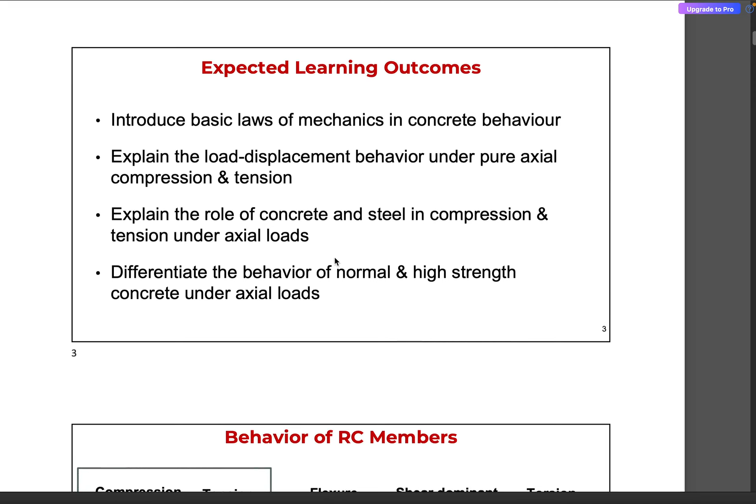These are the expected learning outcomes for this week: we are going to introduce the basic laws of mechanics in concrete behavior, explain the load deformation or load displacement behavior under pure axial compressive and tensile loads, explain the role of concrete and steel in compression and tension - how they take up loads and deform under compressive and tensile loads - and differentiate the behavior of columns using normal strength concrete versus high strength concrete.

Reinforced concrete members are predominantly subjected to four types of stress resultants: axial - compression or tension; flexure, that is bending; shear, as seen in the form of lateral loads; or torsion, that is twisting about the central axis. The focus of this week's lecture and live interaction session is going to be the axial behavior.

We are going to essentially consider a column and develop the force deformation relationship when it is subjected to either compressive or tensile load, and we are going to combine these.

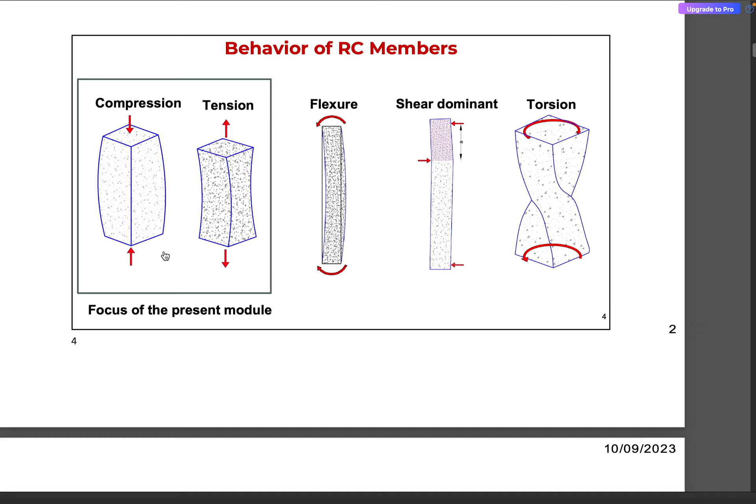Stiffness works to prevent lateral swaying of the frames. Exactly right. So first we are going to provide the bracing so as to ensure a higher stiffness of the structures, because whenever there is a lateral load in the form of earthquake or wind, it can sway in the horizontal direction. So in order to impart stiffness, we introduce bracings.

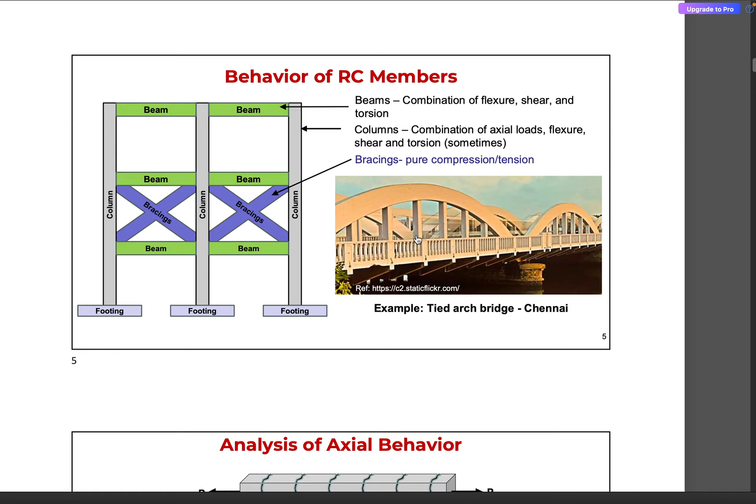These bracings are generally provided with a pin support, pin joint at either ends, so they're usually made to undergo either pure compression or tension. For example, in this tied arch bridge, these vertical members are subjected to either tension or compression.

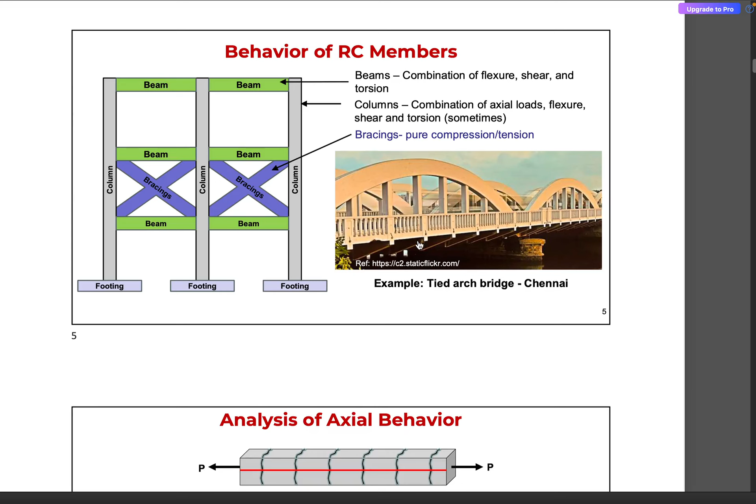Whenever we consider a column, there can be a combination of axial, flexural, shear and torsion, but for this particular module we are going to study only the axial behavior. In the subsequent modules we are going to increase the complexity of the mechanics problem, where we will introduce the flexural load and the shear load, but for this module we confine ourselves only to axial loading.

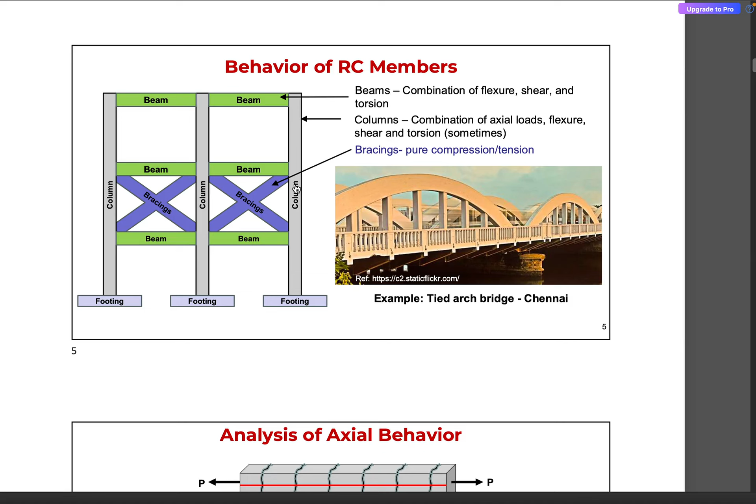Moving forward, here we have a column made of concrete that is reinforced with steel. The behavior of this reinforced column can be likened to that of two springs connected in parallel, having a parallel configuration, with two rigid plates.

Whenever we apply a uniform compressive or tensile load, both these springs undergo equal amount of deformation, equal amount of axial deformation. However, the force is going to depend on the stiffness of each of these springs.

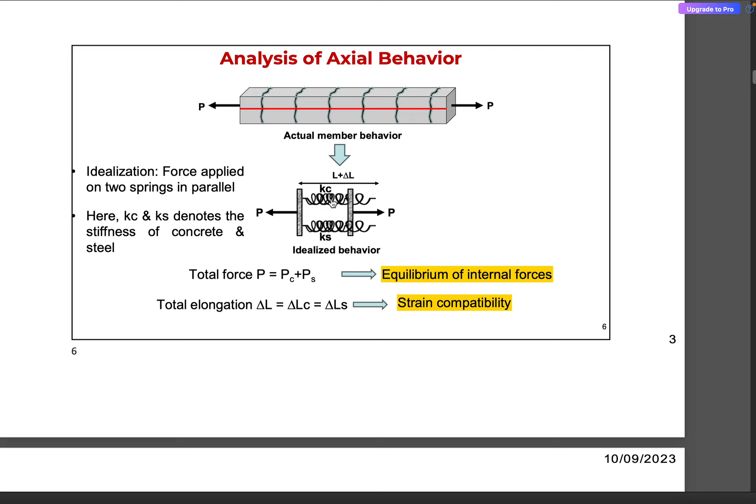So we are going to solve the problem by using two basic principles of mechanics. We have the equilibrium of internal forces, that is, the external load applied P is the sum of the internal resistance provided by the concrete and steel. External load P is equal to resistance provided by concrete plus the resistance provided by steel.

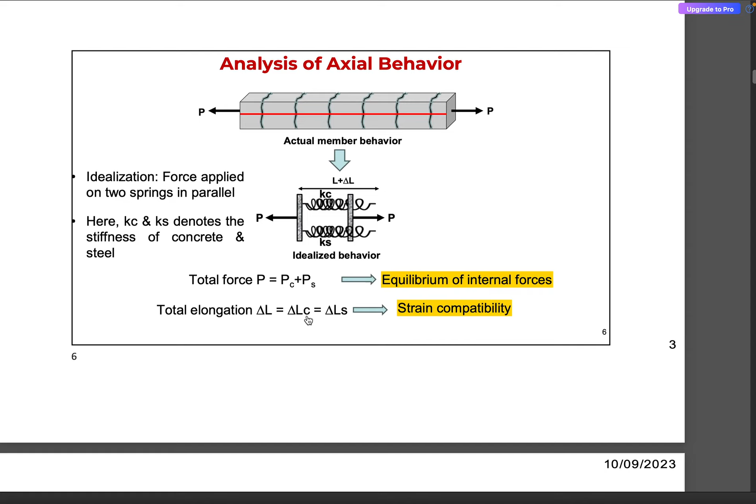And then the second principle is the principle of strain compatibility. We assume that both these springs deform by the same amount axially, that is, elongation delta L is equal to delta LC is equal to delta LS. That is, elongation in concrete is assumed to be the same as the elongation in steel bars.

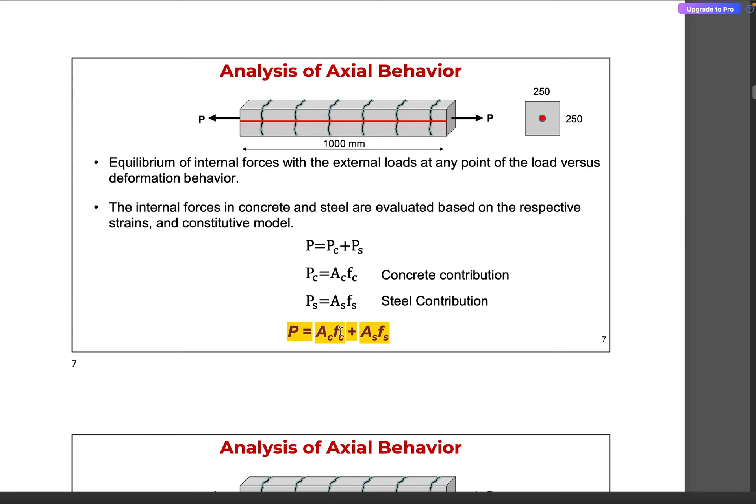So the total load on the column is expressed in terms of the area of concrete and the stress in concrete, and then the area of steel and the stress in steel.

Whenever the deformations are within the linear range, that is, if we consider the stress strain behavior... let me try to explain this with some detail. I'm going to briefly explain this phenomenon. So basically we are discussing about the column.

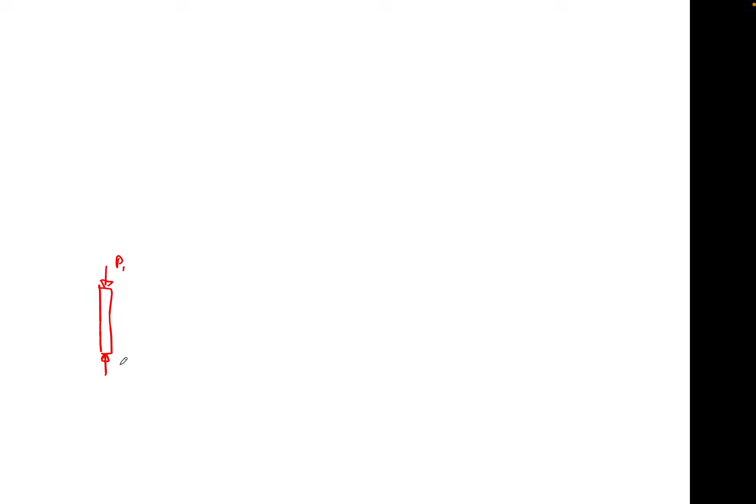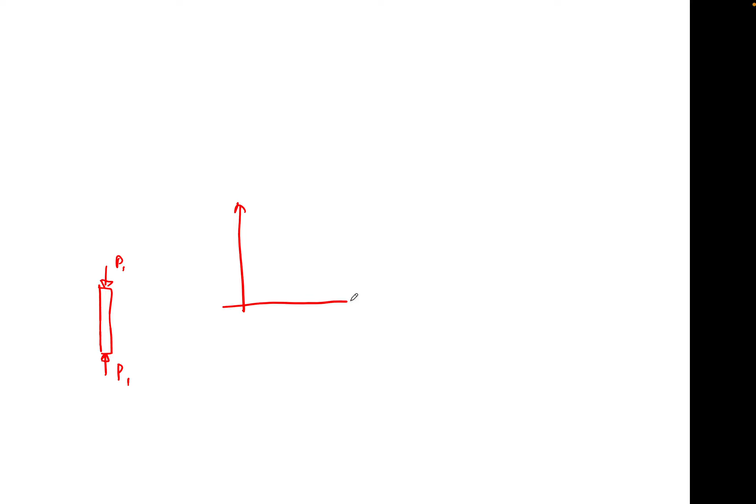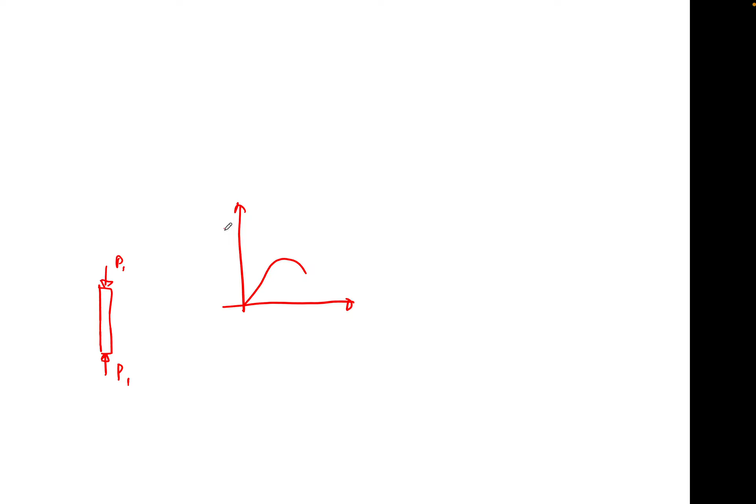So we are going to subject it to a compressive load, let's say it is P1. This corresponds to the stress strain curve of concrete. There is a linear portion before this point, let's call it epsilon 1. So as long as the strain is within the value of epsilon 1, it behaves in a linear fashion.

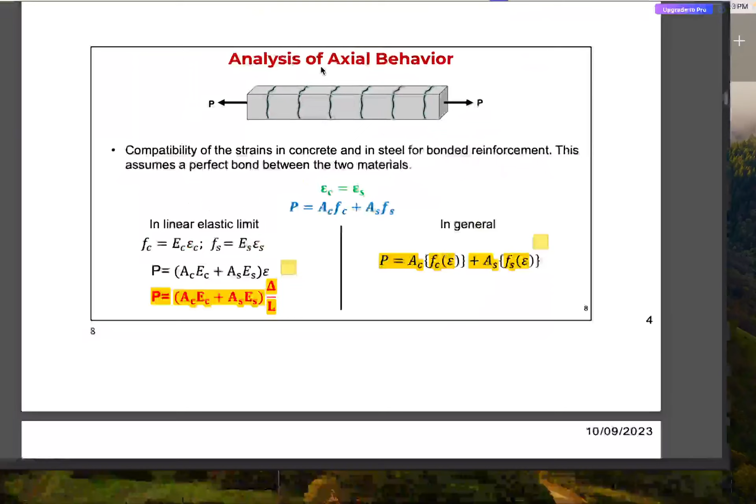In that case, this particular equation holds good: P is equal to AC into EC plus AS into ES, and epsilon is still in the linear zone, still in this linear part of the curve.

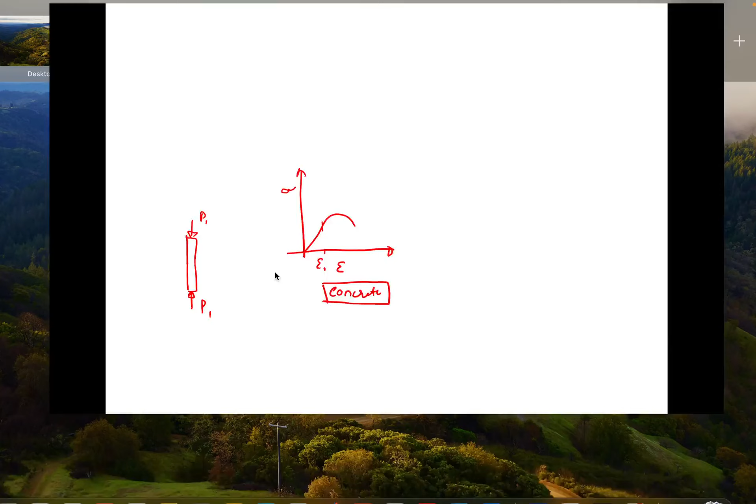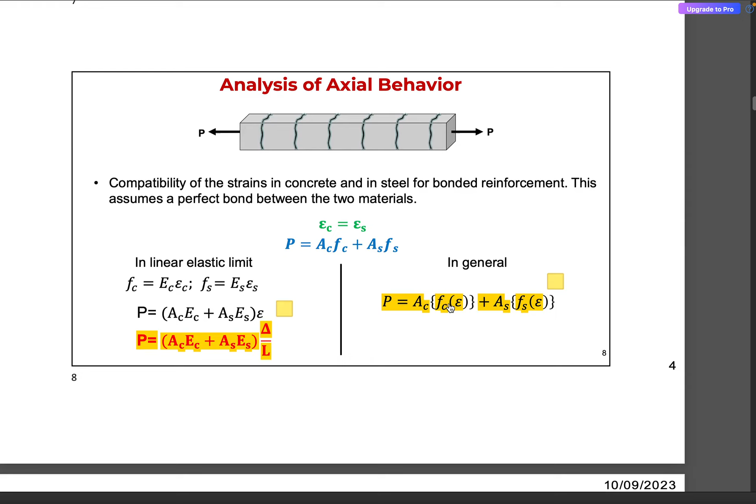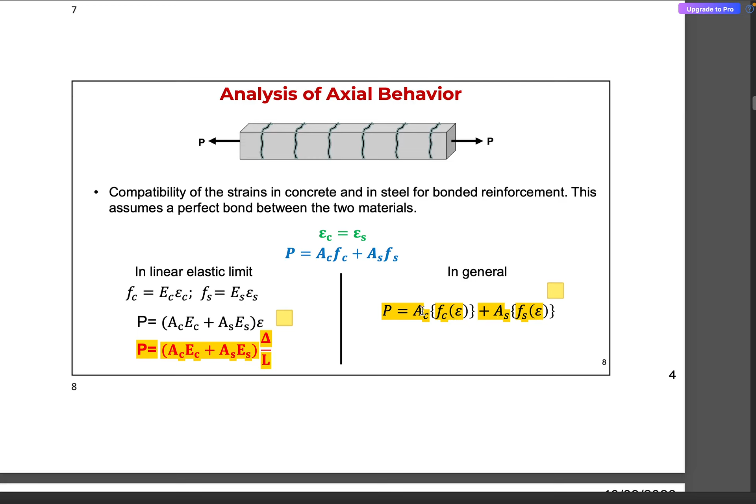However, when the column goes into the nonlinear zone, that is, the strain enters the curved or nonlinear part, the calculations are a little more involved, and we express the stress in concrete as a function of strain. First we pick a value of strain, then determine the corresponding value of stress, and when we multiply that with the area of concrete, and do the corresponding calculation for steel, we ultimately get the value of P, the axial load within the column.

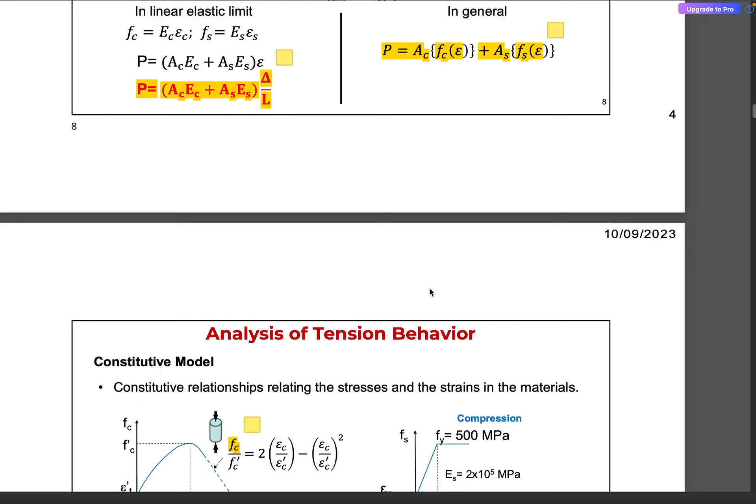In order to characterize the stress strain behavior, we have the parabolic law, or the Hognestad law, for concrete, and then for steel we assume a bilinear relation. Up until the value of Fy, it has a linear relation, and then it plateaus, remaining constant at around 500 MPa. This relation is assumed to be the same for compression and tension.

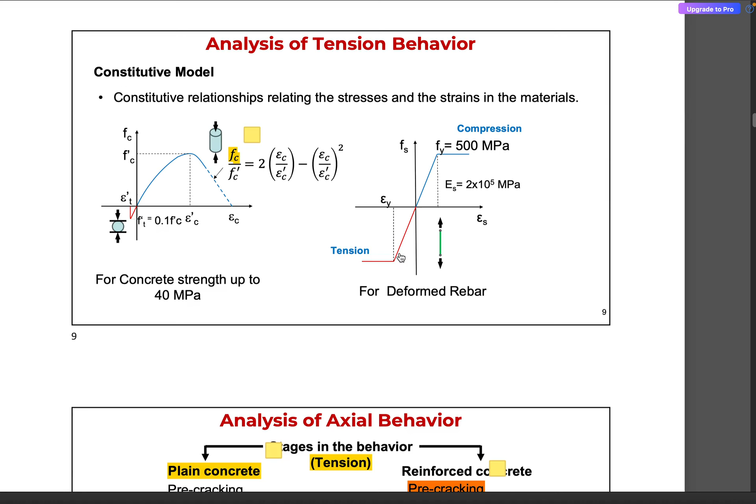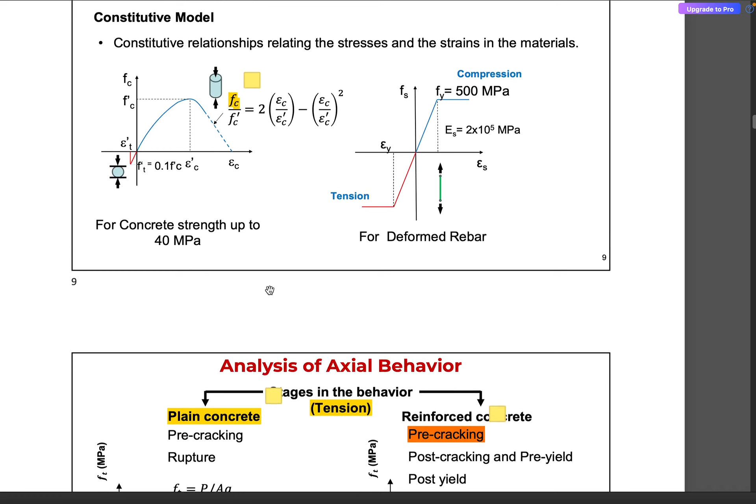And for concrete, however, we have this limit on the tensile capacity. We are going to be discussing more about these concepts in the form of numericals. In fact, 90% of the class today is going to be based on numericals only.

Then we have for plain concrete, the behavior of plain concrete varies from reinforced concrete. So upon reaching the maximum tensile load, the column ruptures. However, when we consider a reinforced concrete column, it has multiple stages.

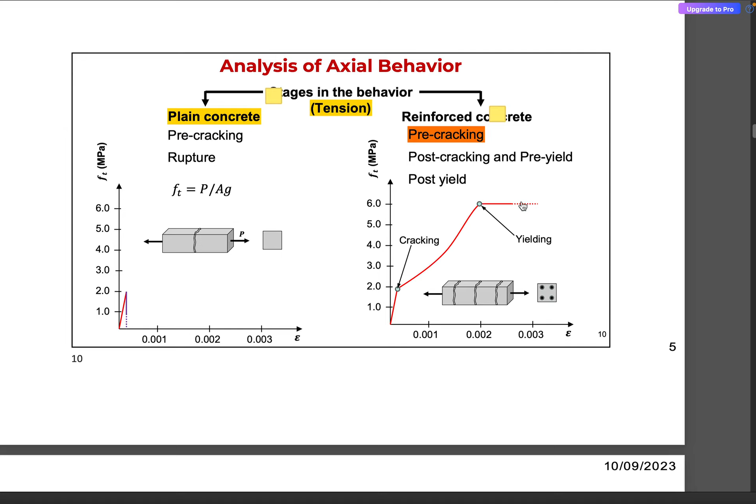First it is going to experience cracking. Up until the point of cracking, all the load is entirely resisted by concrete, but once the concrete ruptures, the load is going to be taken up entirely by steel, signified by this part of the curve. Then once the steel also undergoes yielding, it is going to have a yielding profile.

So we are going to analyze the members for axial behavior. What we mean by analysis is that we are going to develop force deformation curves. This is the algorithm that you are going to follow. So in order to develop the force deformation curve, if we take any axial member...

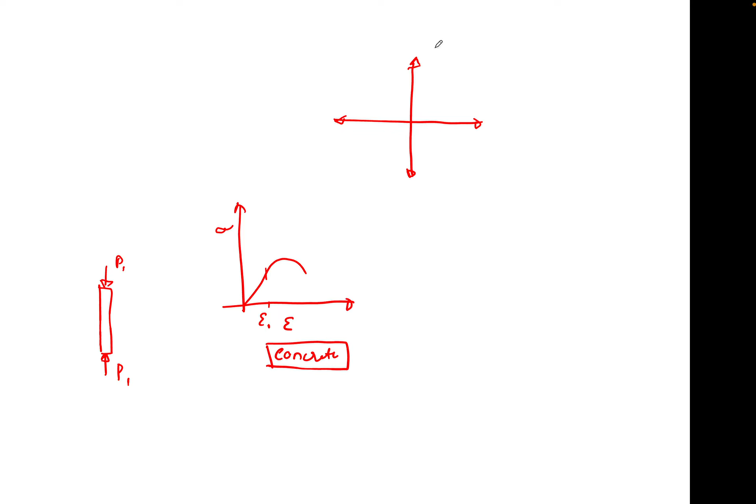The y-axis is defined by the force, and the x-axis is defined by the deformation delta. So what we are going to do is pick different values of strains, and then plot the behavior on the compression side, and then plot the behavior on the tension side.

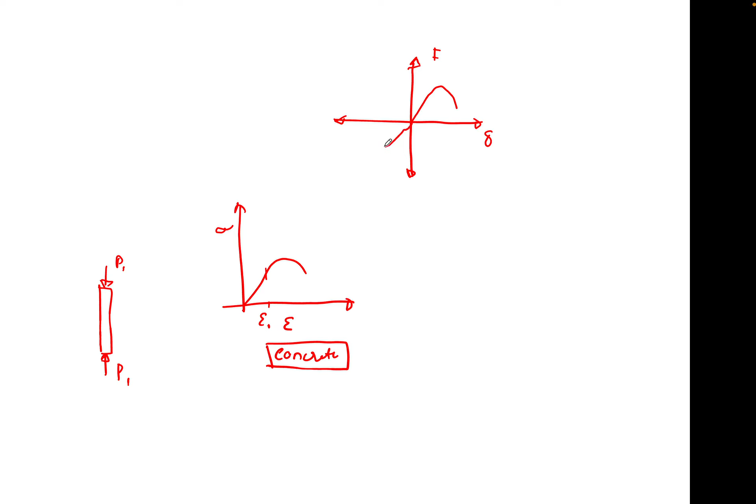This is what we intend to achieve in this class. The algorithm is that we choose a value of concrete strain, then find the corresponding strain in steel through compatibility, and then determine the stresses in concrete and steel through the constitutive model, whether it is the Hognestad relation or the Thorenfeldt relation for concrete, or the stress strain relation for steel. Then we calculate the corresponding load through the equilibrium equation, and determine the axial deformation using the value of strain by multiplying it with the length of the member.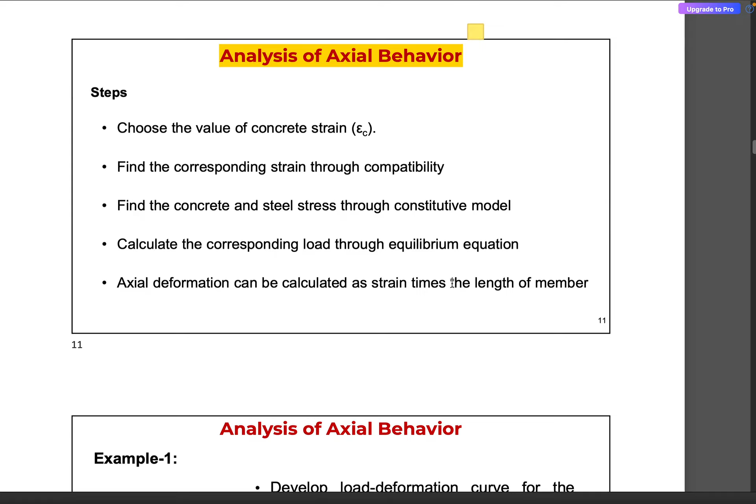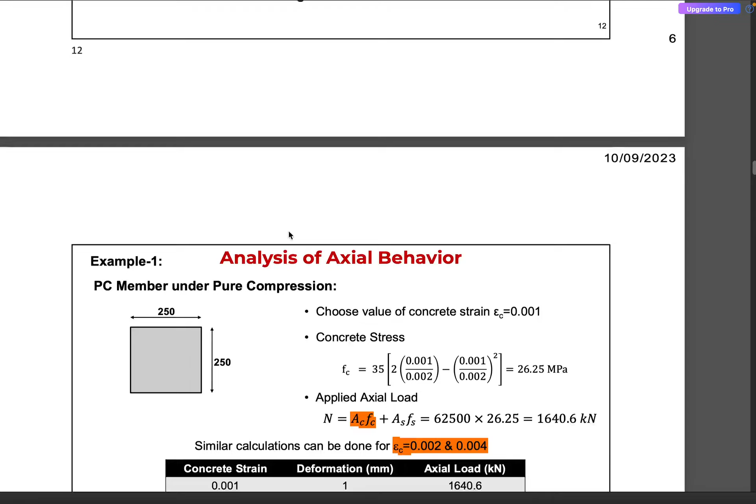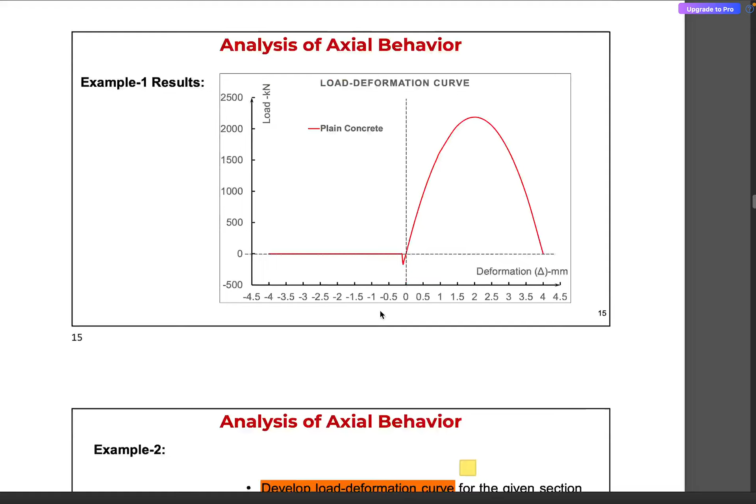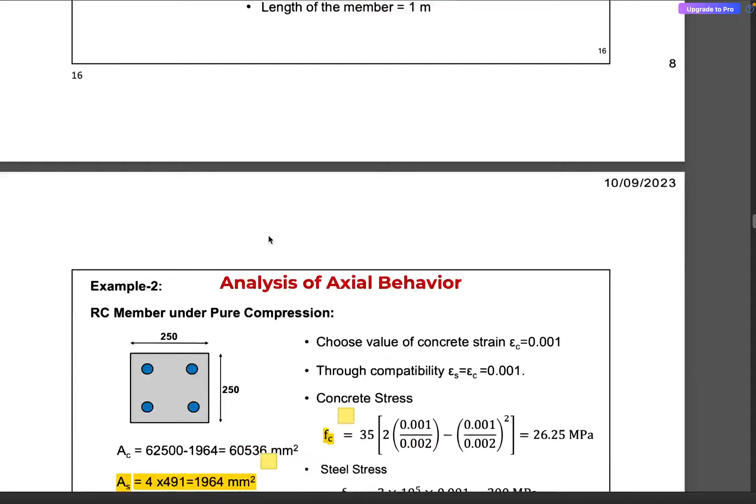In the lecture of Professor Surya Prakash, he started with the behavior of a plain concrete column, and then we developed the force deformation curve. This is how it looks like for a plain concrete column on the compressive side and on the tensile side, and then we looked at how the behavior changes when we introduce these steel rebars.

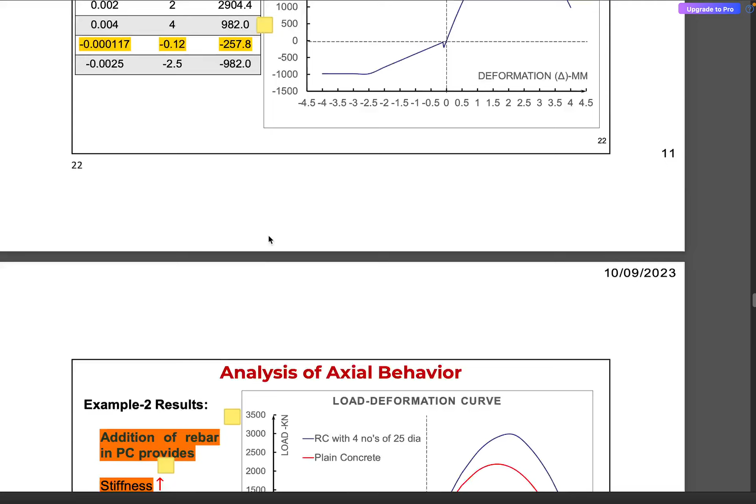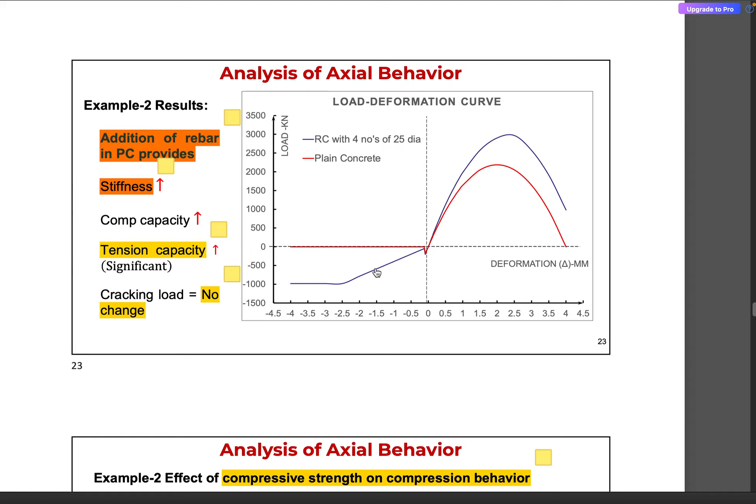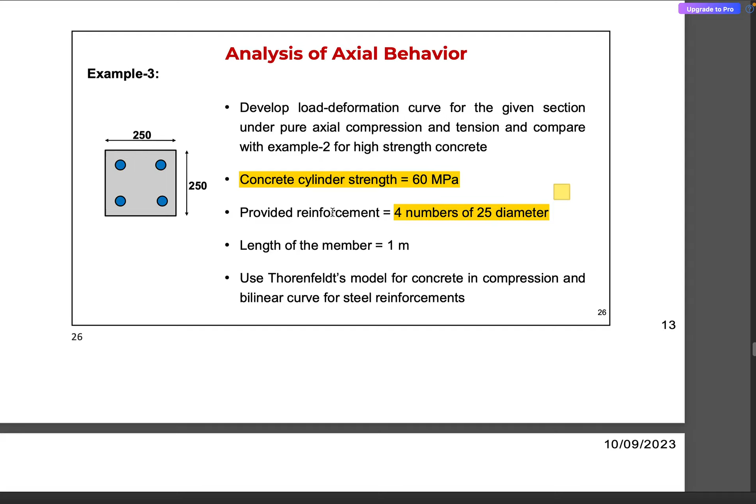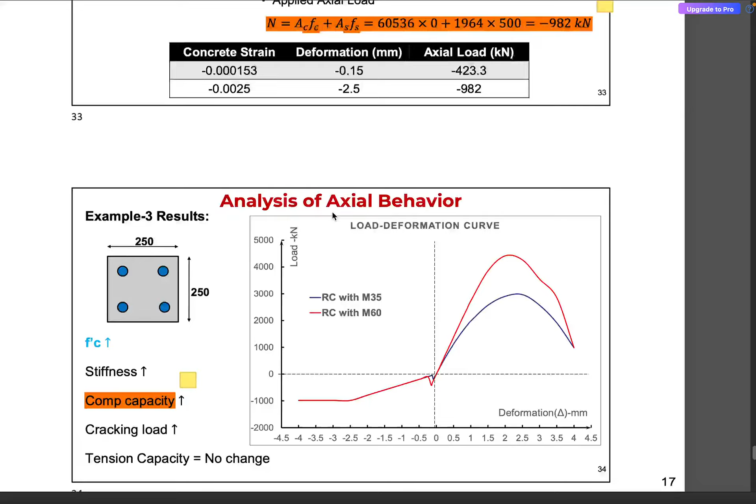Here is a comparison: both the compressive and the tensile capacity of the column improves significantly when steel rebars are introduced. Then for the third problem, we replaced the normal strength concrete with high strength concrete, and with the same reinforcement we evaluated what would be the change in the axial behavior, and after several calculations we developed the load deformation curve.

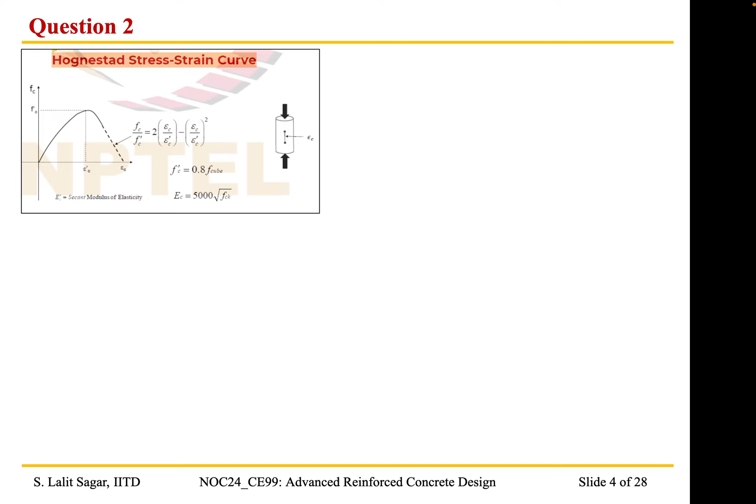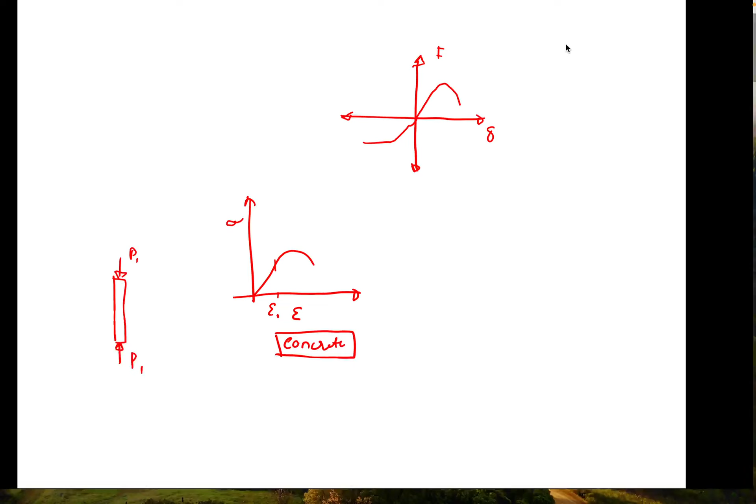Right, as the participants answered, the correct answer is D. I'm happy that you got it correct. I'd like to go ahead and solve the problem for you. Let me outline the steps first.

Step number 1 is that we have the value of epsilon c given. From that strain value we need to find out the value of stress, that is Fc, and from that we need to find out the axial load. It is quite straightforward, and the constitutive relation is governed by this particular parabolic law, the Hognestad stress-strain curve.

So for epsilon equal to 0.001, when we plug the value of epsilon here, we know the value of F prime C, the concrete cylinder strength, is 30 MPa, and we assume the value of the peak strain, epsilon prime C, is 0.002.

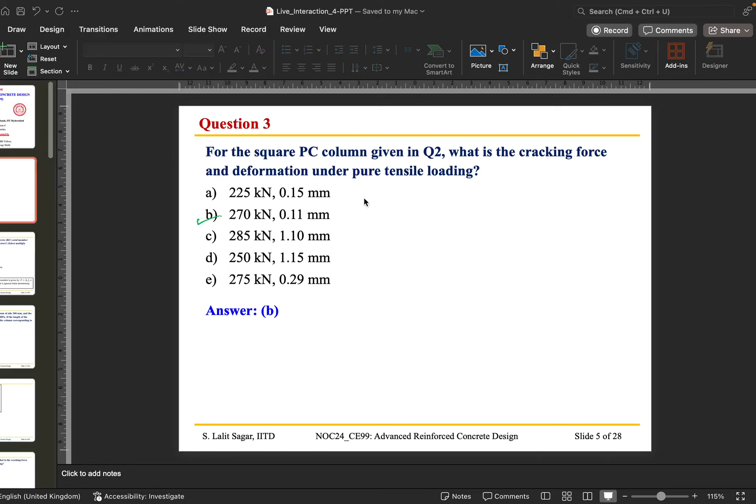So I hope that we are able to solve the problem. Okay, moving ahead, we will go to...

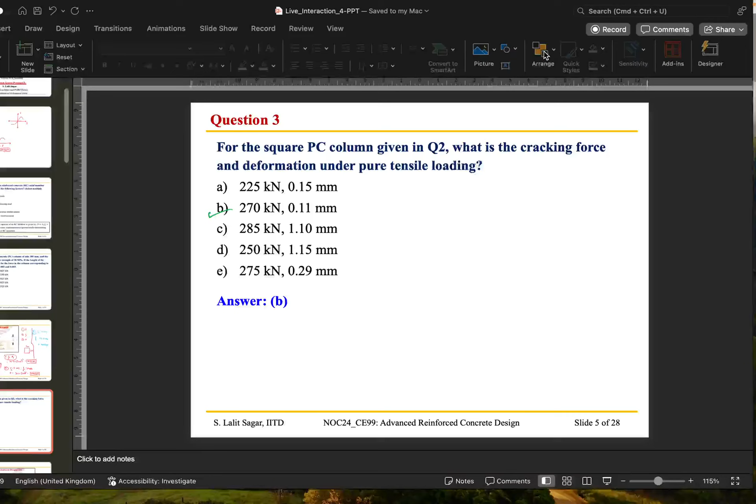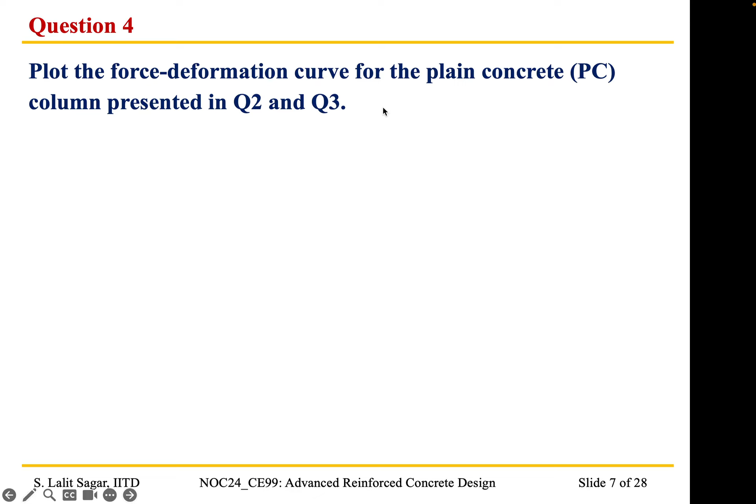Okay, I hope that my screen is visible. So now the question is to plot the force deformation curve for question 2 and question 3, that is, we are going to combine the compressive and the tensile behavior.

Yes, so basically I have used the results that we got from question 2. I'm just going to highlight for clarity. So this particular part of the curve, the positive one, was plotted from question 2, and this from question 3. You can just do a similar exercise with you.

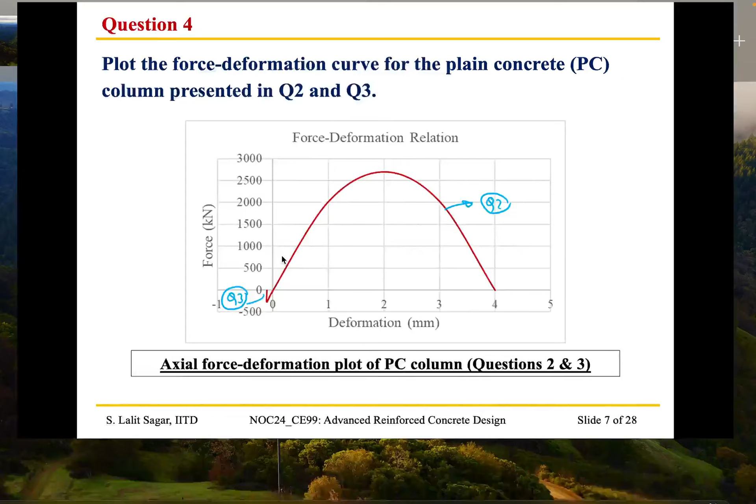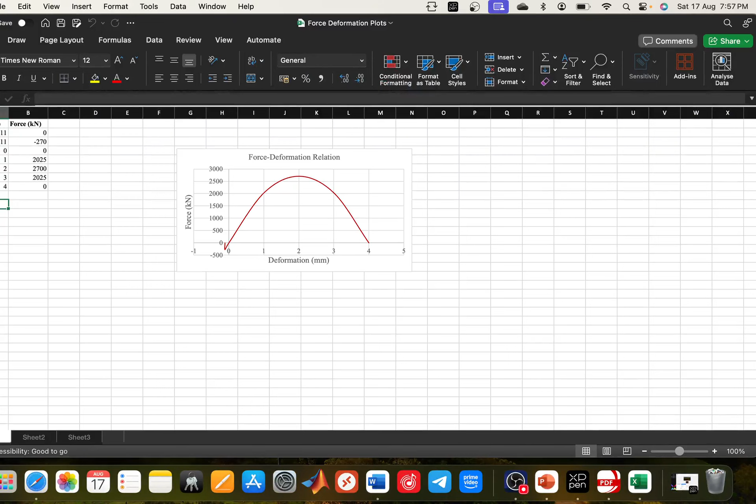If you have, you can just use Excel and plot it. So if anybody is interested, I have solved this using Excel, and I'll be happy to share this with you. I have done it for the different problems that we're going to discuss in class today.

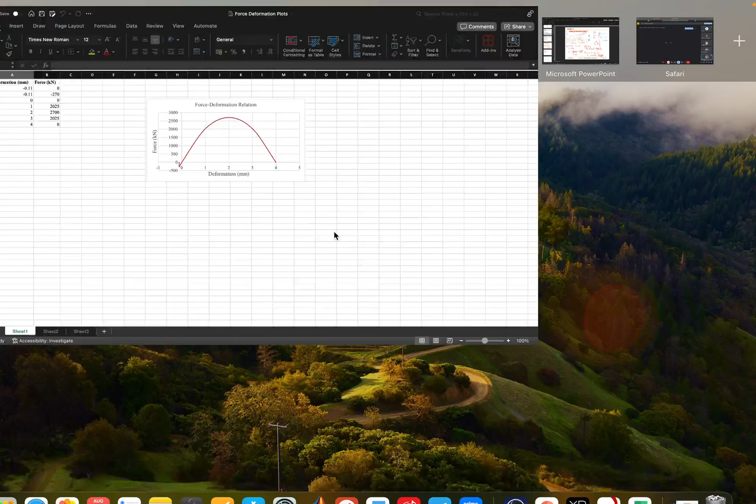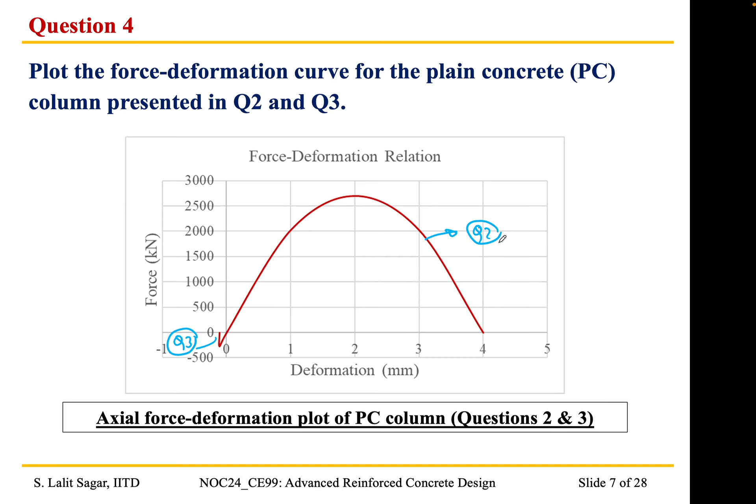Okay, so moving on, we'll move on to the next question. In the first question we looked at the axial behavior of a plain concrete bar. For the next problem we are going to see how the behavior changes when you introduce steel rebars.

Okay, yes, so this is the question. Please read the question carefully. Consider a square concrete column of side 300 mm and length 1 meter. The concrete has a mean cylinder strength of 30 MPa as with the previous problem, and the column is reinforced with 4 steel rebars of 25 mm diameter. What would be the force in the column corresponding to concrete strains of 0.001, 0.002, 0.003 and 0.004? Assume Fy is equal to 500 MPa.

Okay, you can take 4 minutes, then we are going to discuss the solution for this particular problem. I hope that all of you can try the problem, try to solve it.

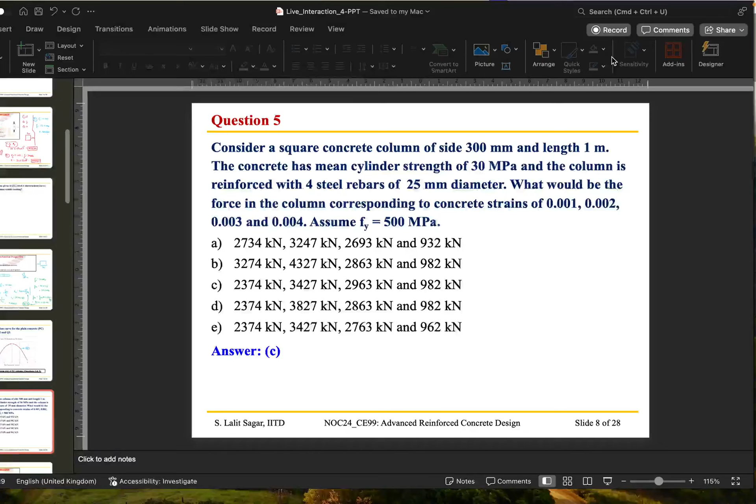So we'll be looking into the solution right now. I'll draw the sketch of the cross section over here for reference. Right, so we have a square column. I hope that the participants who could not answer are noting down the steps. And we have 4 rebars of 25 mm diameter.

Right, so we have 4 bars of 25 diameter. So the first order of business is to find out the value of area of concrete and the steel rebars. So we have area of steel is pi by 4 into 25 square multiplied by 4. We get 1963.5 millimeter square, and AC would be 300 square minus AST. Okay, so that would give us a value of 88036.5 mm square, right?

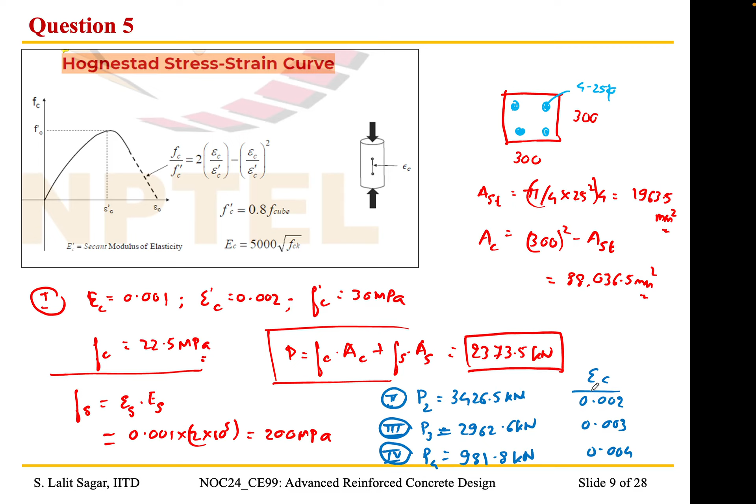Okay, so we are going to plot the force deformation curve in subsequent slides, but before that there is a problem, and we would like to know, just like how we saw what is the load corresponding to different compressive strain values, what would be the cracking force corresponding to the pure tensile loading? What would be the cracking force and the corresponding deformation? So you can take 2 minutes, then we can look at the solution.

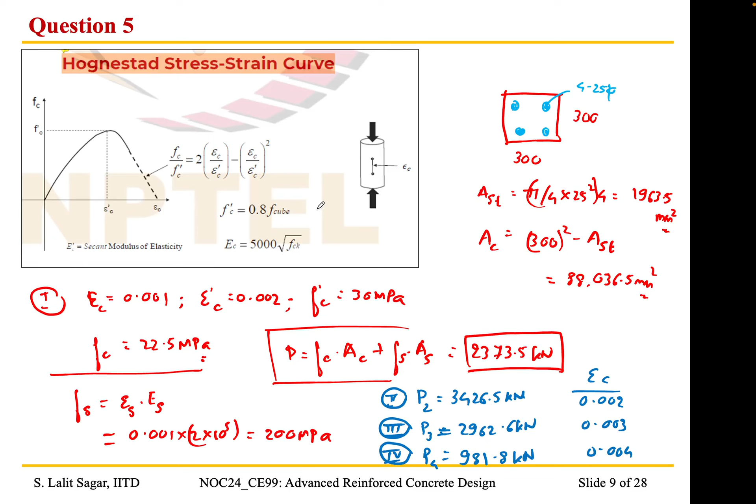However, the cracking load doesn't vary so much. Let us look at the value of cracking load. It was 270 kilonewton for a plain concrete column, and for the reinforced one it was 307 - hardly a 10% increase. So in comparison to other properties, the initial cracking load was least affected, or it didn't vary significantly.

So we will move on to the next problem. Again, stiffness increases, compressive capacity increases, tensile capacity increases, but there is no significant change in the cracking load.

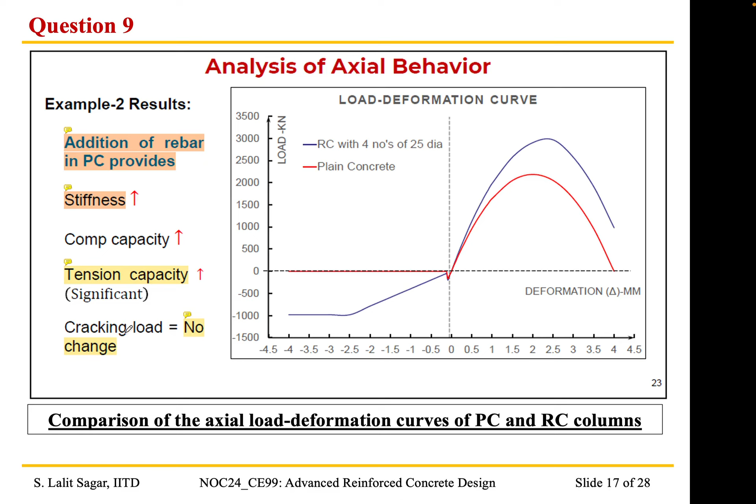So we are going to look at a concrete column with high strength concrete. For the square concrete column of side 300 mm and length 1 meter, what would be the force in the column corresponding to the strains of 0.001, 0.002, 0.003 and 0.004, where the mean cylinder strength is 65 MPa and the column is reinforced with 4 steel rebars of 32 mm diameter. Kindly solve this problem.

You can take 5 minutes. The main change to consider here is that in the previous problem we had considered the parabolic stress strain relation, or the Hognestad relation, but here, since it is high strength concrete, we need to consider the Thorenfeldt relation. So I request you to have a look at the lecture slides of week number 2 and week number 4 and try to solve this problem.

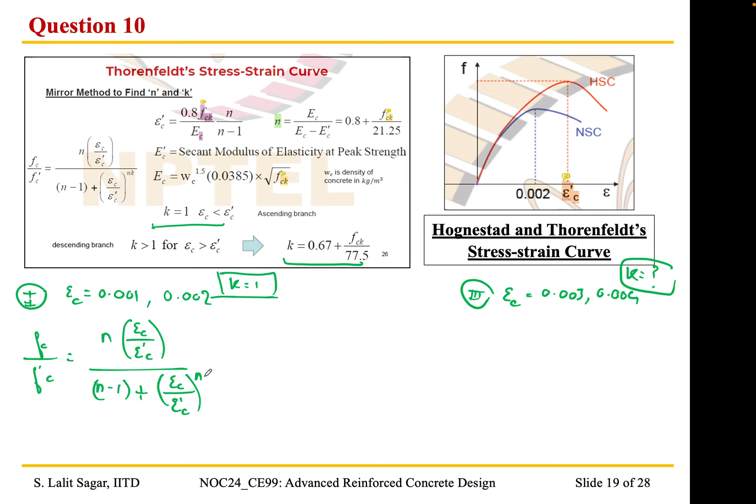So first of all we start off by finding out the value of n. I'm going to write it in a different color so that we can obtain the values required in this equation and start plugging them in. So the value of n is given by 0.8.

So while discussing in the live interaction session 2, I had requested you to make a modification in this formula. It is not FCK, it has to be FCU, that is cube compressive strength, by 21.25. Substituting: 0.8 plus 65 into 1.25 divided by 21.25 gives us a value of 4.62.

So when we plug it in this equation, for simplification, for 0.001 I'll take epsilon c by epsilon prime c as 0.5. So when we substitute in this equation, we get 65 into 4.62 into 0.5 divided by 3.62 plus, I'm sorry, this has to be plus, excuse me, let me take the eraser. Yes, so we have 3.62 plus 0.5 to the power 4.62, because remember k is equal to 1.

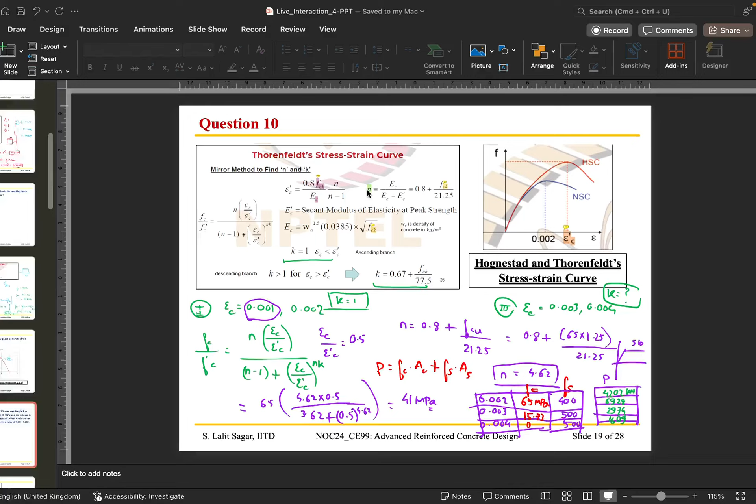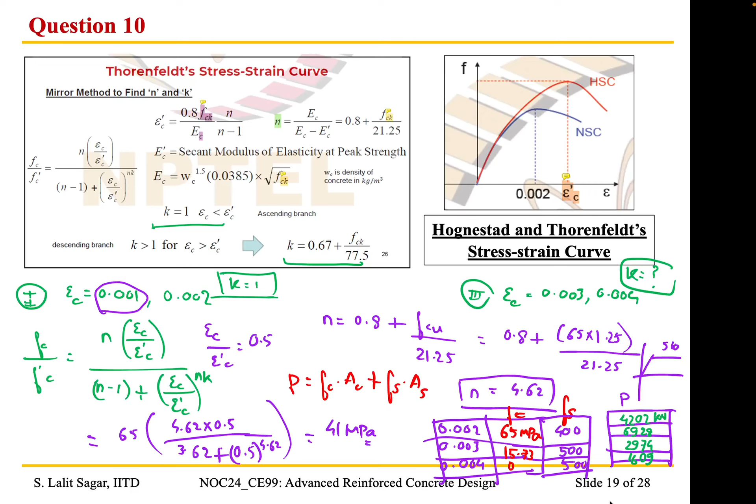Okay, so moving on, what would be the cracking force and deformation under pure tensile loading? This is a continuation of the previous problem. So I request all of you to attempt this problem and let me know the answer.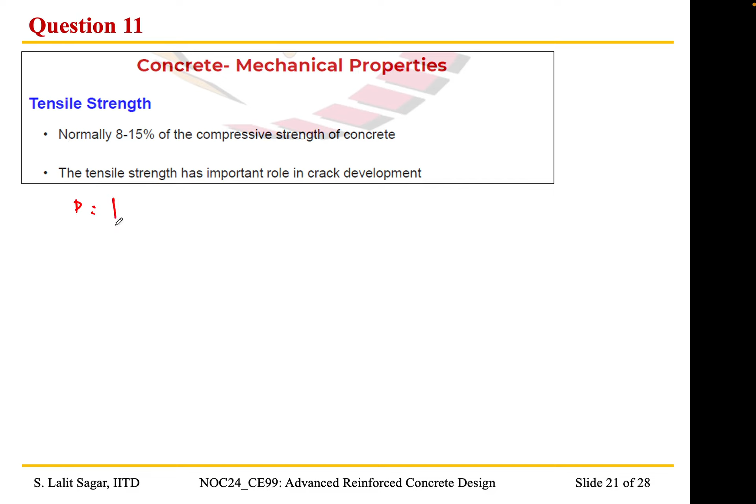Okay, so I think I'll go ahead with the solution. The correct answer was option A. And again, the way to solve is quite similar to what we did with the normal strength concrete. So ultimately we need to find out the value of P. P is equal to FCT, we will write tension just to differentiate, plus Fs into As. So FCT is 0.1 into 65, so that is 6.5 MPa.

Okay, and this is the tricky part. We need to find out the value of Fs. So how do you find out the value of Fs? Fs is given by epsilon s into Es... wait, now we need to find out the value of epsilon s. This particular epsilon s is given by: epsilon s is equal to Fs by EC, modulus of elasticity of concrete.

And for high strength concrete, the value of EC is given by this equation: EC is equal to WC power 1.5, that is the density, into 0.0385 into square root of FCU. So when you plug the values in this equation: 2400, that is the density of concrete, power 1.5, into 0.0385 into square root of 65 into 1.25. It's pretty straightforward. We get the value of modulus of elasticity as 40802.76 MPa.

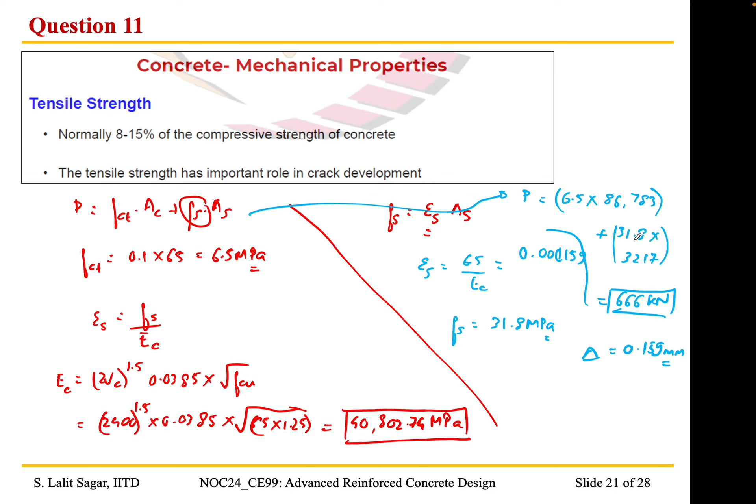So we have one last numerical question. After this it is going to be just a discussion of the force deformation curve. I request all of you to quickly solve this problem. It is straightforward: you have to find out the force and deformation in the column corresponding to the point of yielding of steel reinforcement under pure tensile load. Kindly take 1 minute, the procedure is similar to what we did in the previous question.

Option E. Thank you for the response. We will wait for 30 seconds if anyone wishes to contribute.

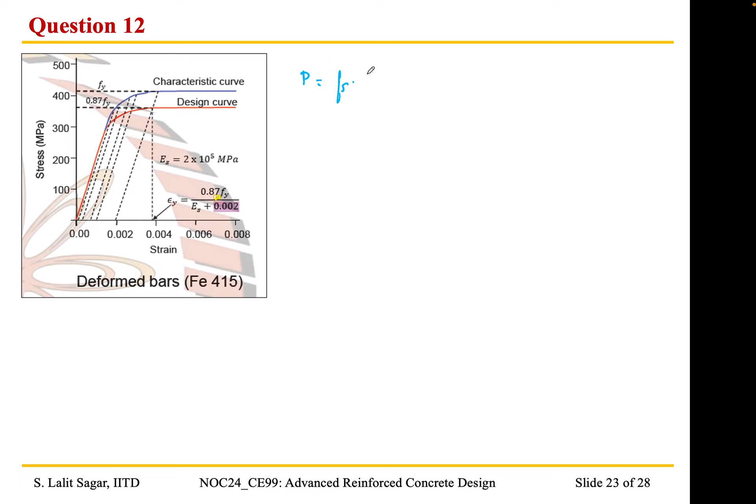Okay, so we will go ahead with the solution, and as the participant rightly pointed out, option E is the correct answer. It is quite straightforward, you have to find the value corresponding to the yield of steel reinforcement. So P is equal to Fs into As. We'll write it for completeness, but once cracking has occurred, Fc becomes 0. We have Fs is 500 MPa, that is the yield strength, and As is 3217 mm square.

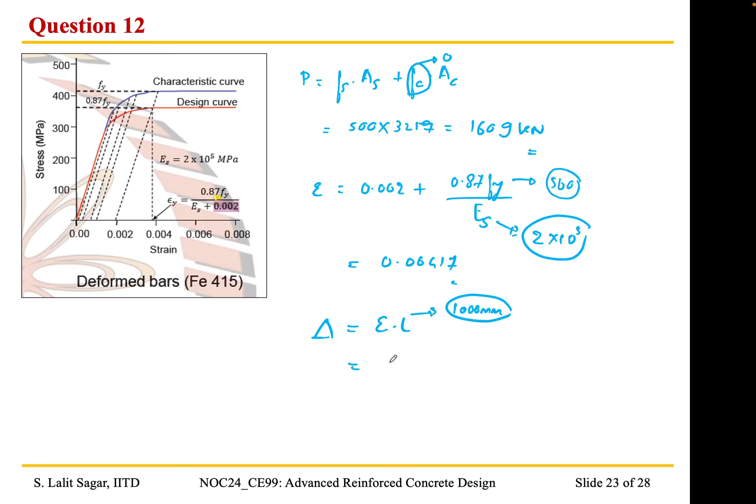That gives us a value of 1609 kilonewton. And epsilon is equal to 0.002 plus 0.87 Fy by Es. When you substitute Fy as 500 MPa and Es as 2 into 10 to the 5 MPa, you get a value of 0.00417, as we saw in the previous problem. The deformation would be epsilon into L, and L is 1000 mm, so we get 0.00417 into 1000, which gives us 4.17 mm.

So these are the final results. I hope you were able to arrive at the right answer. So the correct answer is option E.

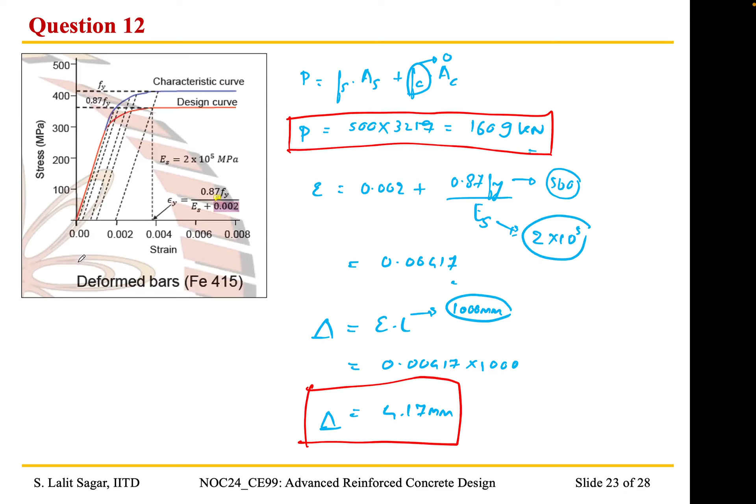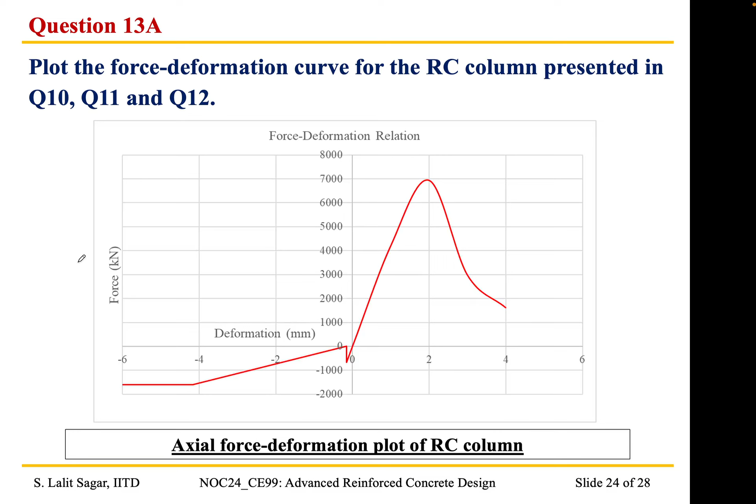So here we have just tried to plot the force deformation curve. This is what it looks like, and ultimately the comparison between the three columns that we have analyzed in this particular class.

So again, I have plotted this using Excel. One side note is that basically these force deformation curves are usually predefined when we are doing analysis and design on commercial packages such as SAP and ETABS. But when we are doing a research problem, when you need to look into a problem with some additional data, you need to develop these kinds of curves and analyze, which can actually provide slightly different results compared to the conventional commercial packages.

So if anyone is interested, I'll be happy to share the Excel file with you, and you can play around with different members and cross-sectional properties of different columns and their different force deformation relations.

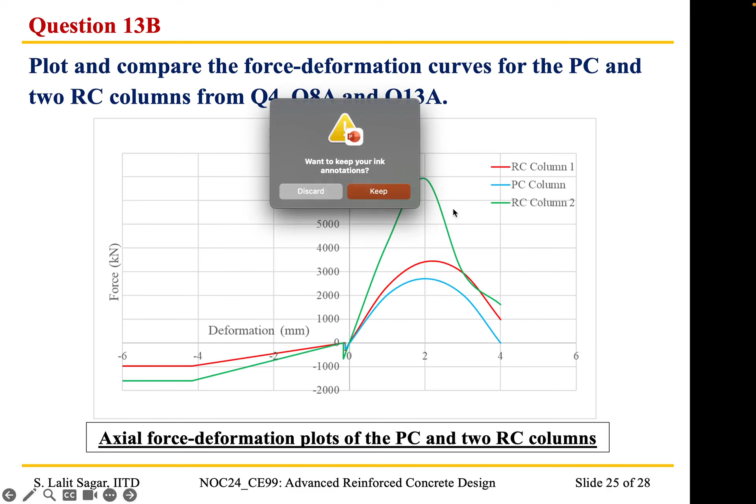So okay, we have one more problem. I hope this is fine because we have exceeded the time limit. I hope we can stay back for another 5 minutes. Yeah, I know today it has been quite long, this session, but my intention was to cover the numerical problems. So with your permission, I will extend the class by another 5 minutes.

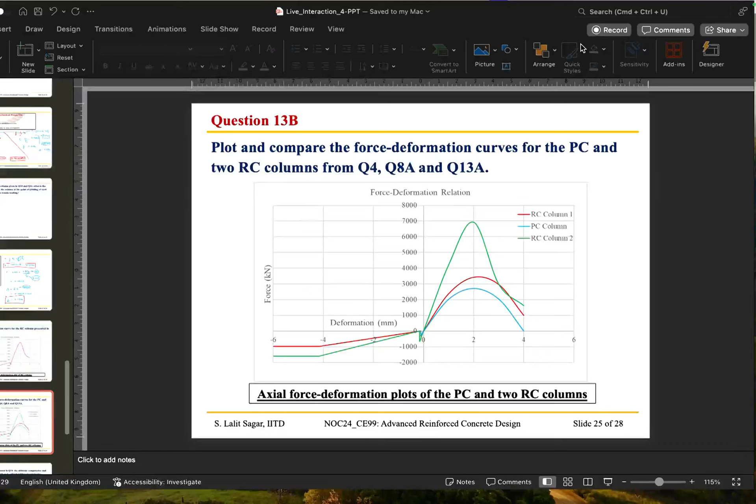Yeah, so we will take up the last problem for the day. Thank you for your patience. But this is really important, this question 14, I think it sums up whatever we have learned so far. So I request all of you to kindly be patient and solve this problem.

In the previous question, we found that the ultimate compressive and tensile strength are 6928 and 1609 kilonewton. If we need to increase the compressive and tensile strength to 8000 and 1800 kilonewton, what should be the revised area of concrete and reinforcing steel?

Okay, so this is the question. I'd like to give you 2 minutes to come up with the approach. If you can tell me the approach, that would be good enough, and then we can solve the problem together since we've already exceeded the time. I hope you got the question right. So if you've understood the problem, how do we go about solving this?

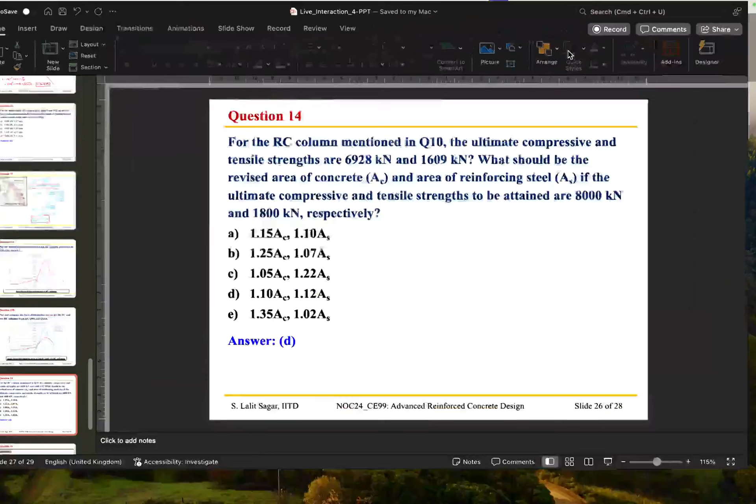I'm really glad you were able to answer that, and just for the benefit of all the participants, I'm going to give a hint. We need to look at the compressive capacity and the tensile capacity. We have the equilibrium equation, that is P equals Fc into Ac plus Fs into As.

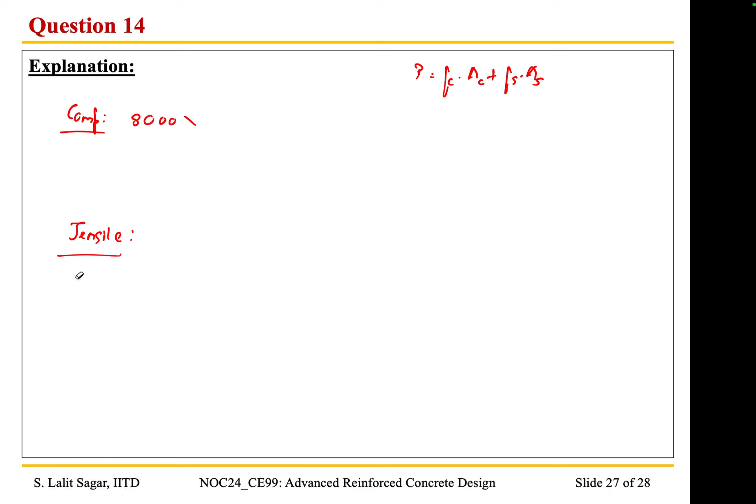So for compression we have 8000 into 10 to the 3 equals Fc, which is 65, the cylinder compressive strength, into Ac, plus Fs, which is 500, the yield strength, into As. We'll keep this aside for a minute.

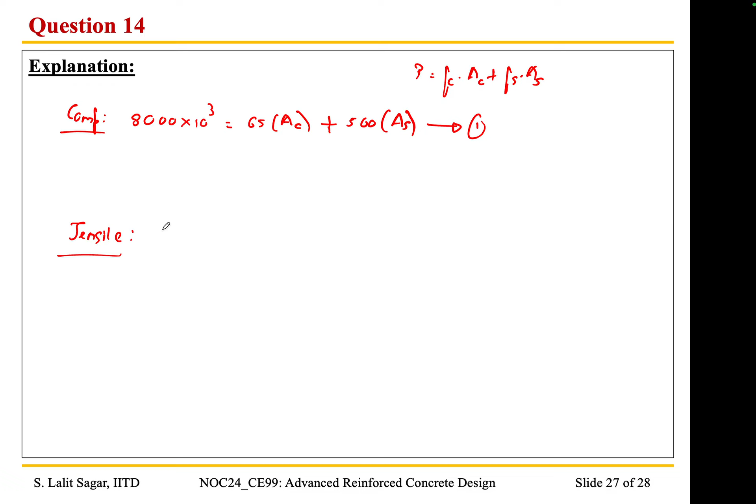Now let us look at the tensile strength. We have 1800 into 10 to the 3, and Fc we take as 0 because once the concrete has cracked, its resistance becomes completely 0. So that's Fc into Ac plus Fs into As, where Fs is 500 into As, which is unknown.

So from this, by solving equation number 2, we get the value of As equals 1800 into 10 to the 3 divided by 500, which gives us 3600 mm square. When we substitute this value in equation number 1, we get the value of Ac as 95,384.6 mm square. I request all participants to verify these values.

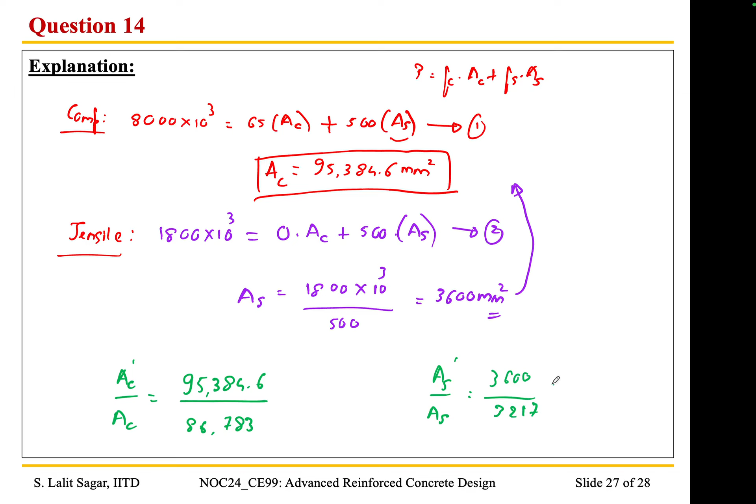So that is 95,384.6 divided by 86,783, and As prime by As, that is 3600 by 3217. We get the value as 1.10, and here we get the value as 1.12. I hope you were able to follow, and I request all of you to verify that you're getting these values, not only for this question but for all of them.

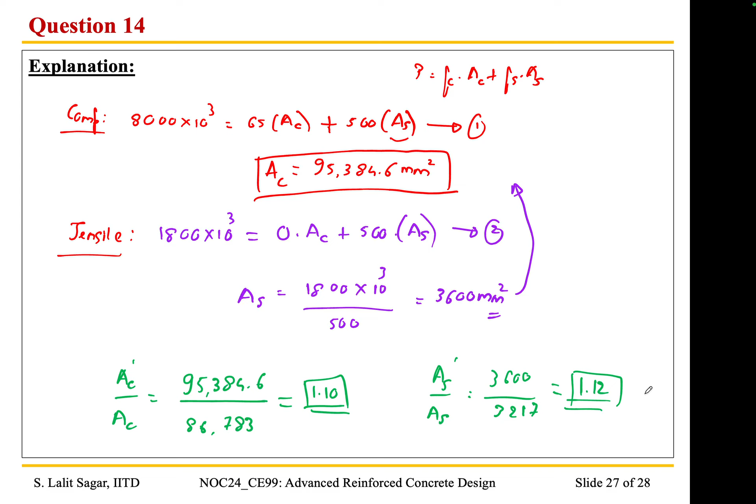I think with that we'll come to a conclusion of today's live interaction session, and I thank you all for joining tonight. If there's any feedback from the participants, I welcome you all. Today was a very intense numerical-based class, so if there's any suggestion from your side, we can incorporate that in the upcoming weeks. If not, I thank you all for your patience and attention. Next week we'll deal with flexural members.

Would you like to add something, Mr. Dev? Nothing sir, just before the start of the lecture, can you give us some notes or something so we can prepare and come to class? All the problems I'm solving are based on the week's lecture that the professor is teaching, so I hope you have access to that PDF.